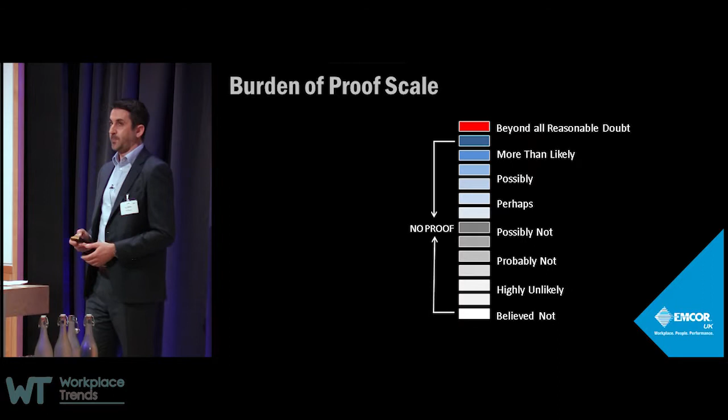Now, I did a bit of research and I discovered this, which is the burden of proof scale. So the burden of proof is used to put evidence against this scale. Obviously, you've got believed not at the bottom, all the way up to beyond all reasonable doubt at the top. And I thought, would it be interesting if we put this question against that scale? So that's what I'm going to do today. Our question for the day is, does the internal environment affect performance and productivity?

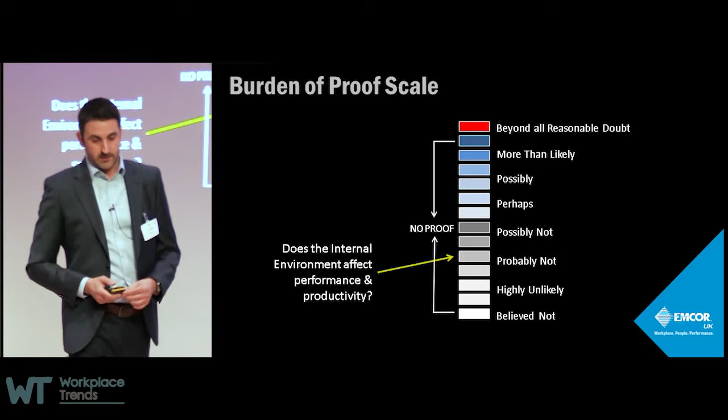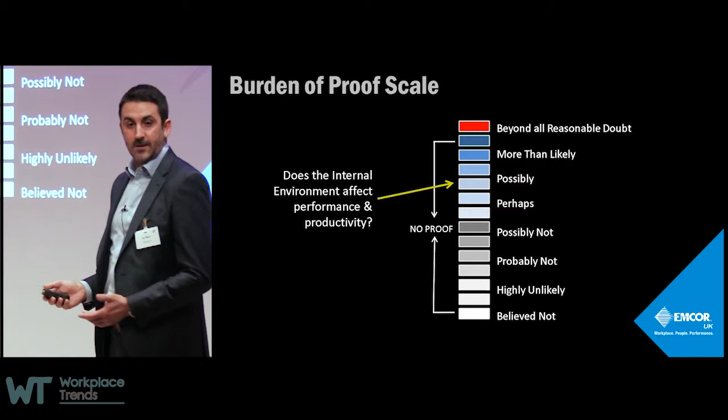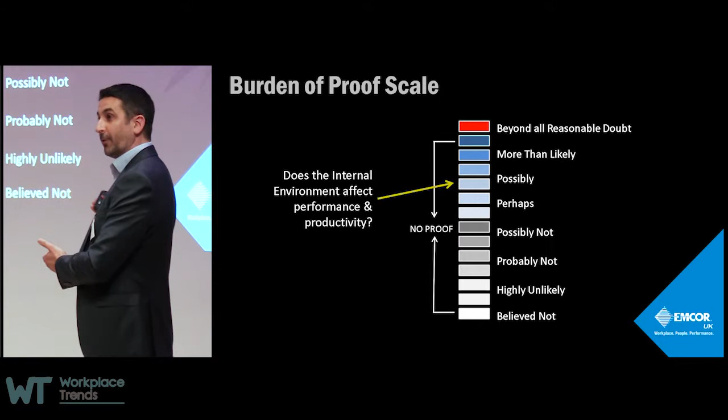So if we put this on this scale, and this is a predetermined slide, where would it be today? And I think it's round about there. I don't think that we could argue it's going to be any higher than that. Might be a bit higher, but with the data that we've got, the fact that it's not mainstream, it's somewhere around about there. Now, my aim is that at the end of this presentation, you'll all join me as members of the jury, and we'll see if we can push that level up.

Okay. So the study was done. It was a consortium of companies that came together, and it was called Whole Life Performance Plus. It was led by LCMB, with academics at Oxford Brookes University doing all the data crunching and the peer-reviewed reports. And there were case study partners, Argent, Emcor UK, and King's College London. Now, it was funded by Innovate UK and the EPSRC. I always get that wrong, EPSRC.

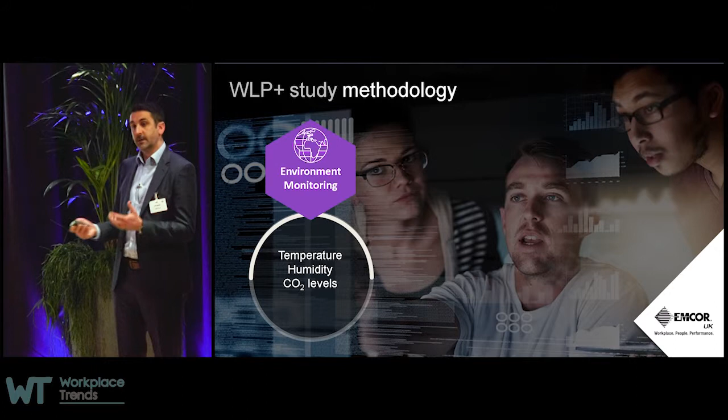It was quite a high fund, 530,000, and its main focus was to empirically validate the link between the indoor environment and productivity. So proper evidence-based management, evidence-based understanding. Now, it did that in 3 ways. We did a study of the indoor environment. We looked at temperature, humidity, and CO2. And at the same time, we were looking at the outside environment in terms of temperature and humidity to understand what's going on inside and outside.

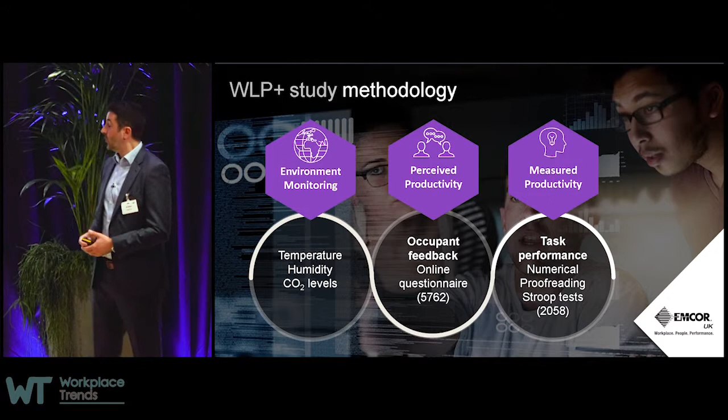Like everybody else has done today, we did perceived productivity tests. So this was basically occupant feedback, it was an online survey. I think that app would have been fantastic if we'd had access to that. But it was an online survey and 5,762 responses. And then we measured productivity. So again, this was same occupants, Stroop tests, numerical tests, proofreading tests, all that stuff. Over 2,000 respondents.

Now, the unique bit with our study is that it was in real-life buildings. And as I said, we had case study partners. This was the King's College London building. It's the JCMB building in Waterloo. 10,000 square meters, 1,200 occupants. It's an old building. It was constructed in 1938, mixed mode of ventilation and in-house FM.

And then Emcor UK, very lucky to have the National Air Traffic Services as a customer of ours. NATS immediately saw the benefit of the study and offered up the building that you see there. It's their corporate and technical centre, nothing to do with air traffic controllers. Corporate and technical centre in the leafy suburbs of Fareham in Hampshire. So two very similar sized buildings.

In the field, the approach was that we did an intervention. So we did a baseline period, baseline before intervention. We baselined the buildings in a 7-month period in which we monitored again the internal environment of those buildings and the external environment in those locations, whilst asking the occupants questions. That was it, 7 months.

We did 3 weeks of surveys. And then we did an intervention stage of 10 months, where we tweaked the environment as best we could. So obviously both those buildings are very different, quite difficult to alter the environment, but we did make some significant changes to it. And then we resurveyed everybody throughout that period to see what effects altering the environment had.

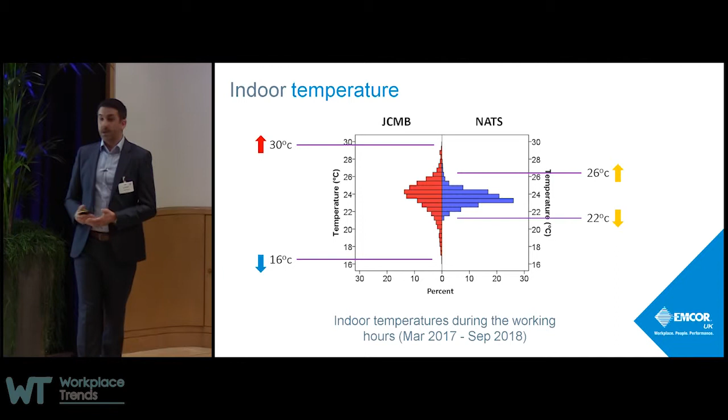So just run through the buildings because I think they're quite interesting from a start point. The two buildings, as I said, very different. JCMB, in terms of temperature, reached a scorching 30 degrees in the summer and an absolutely freezing 16 degrees in the winter, so huge range. Whereas NATS, it's mechanically ventilated, it has air conditioning. It was just a fairly constant 22 to 26.

In terms of relative humidity, there's a guideline that says that relative humidity should be between 40 and 70%. Both the buildings were below 40% for quite a lot of time. Interestingly, the NATS building was below 40% for the longest period of time. And obviously that's because it has air conditioning, but the ramifications of that is colds and flus can actually travel much easier in low humidity environments. So although we couldn't test for this in terms of a productivity score, it's something that we needed to be aware of.

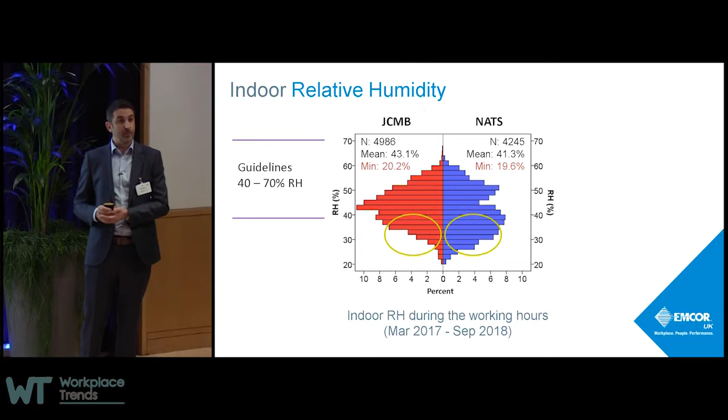And CO2 levels is the thing. So CO2 levels across these buildings varied widely. Now, the JCMB building, as I said, is a traditional building. It has windows that open. It has wet system radiators. So as you can see on that graph, it peaked at well over 2,000 parts per million. Now that's in the heating season. So windows are closed, heating's on, bad ventilation, CO2 rises, and there's nothing that they can really do about that.

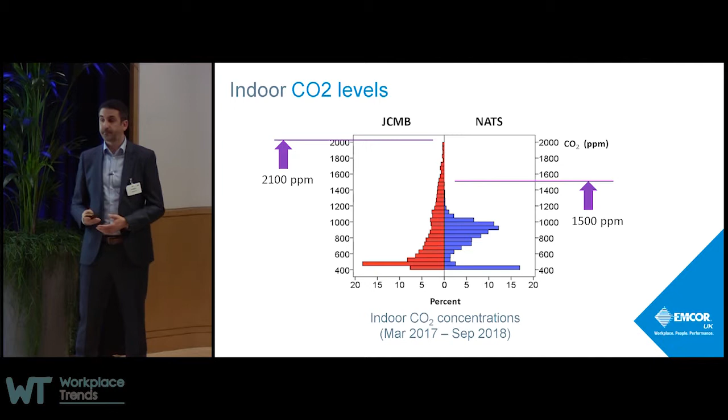So, we learned that if you feel uncomfortable, you believe you're less productive. Now, this isn't about providing people more cushions and soft furnishings, although as a workplace consultant that does help. But if you feel that your temperature variances are not being met, then you report a lower level of productivity. Now, this is shown in this graph. So we have self-reported productivity on the left and comfort on a scale of 1 to 7 across the bottom. You'll see that the more comfortable people are reporting themselves, the higher the productivity is.

Interestingly, this works for thermal sensation as well. So if you're too cool or too hot, as seen on that graph, your productivity can dive on either end of that scale. So what does this mean? Let me just go back actually, I need to explain this. There's 2 lines on that graph. There's the yellow line, JCMB, and the blue line, NATS.

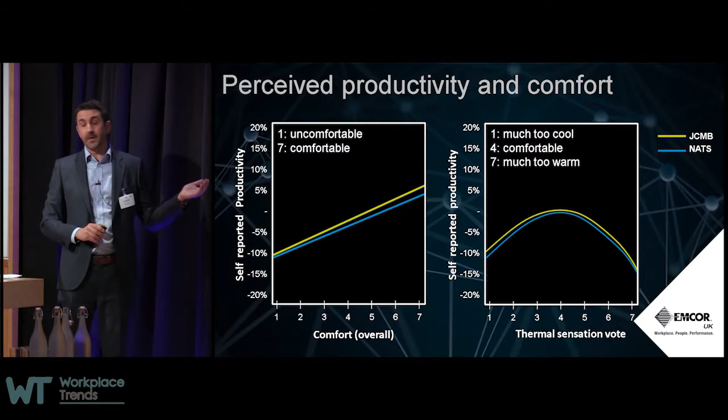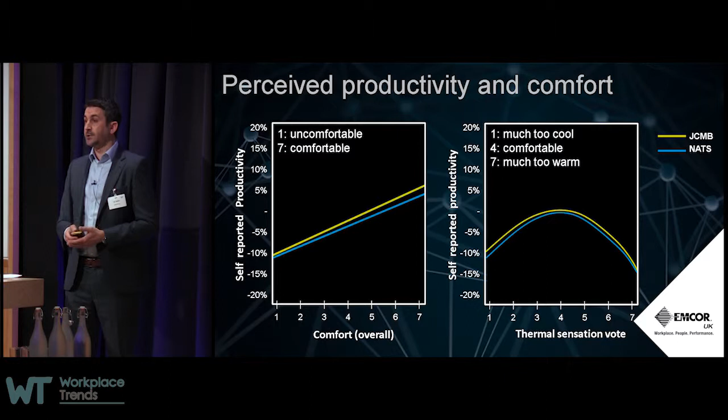Now, if you remember that the JCMB building had a wide variance of temperature, 30 to 16, and NATS was much less, you'd think that the JCMB building would be saying that they are less comfortable and therefore less productive. But interestingly, the trend followed very similar lines. In fact, the JCMB building reported slightly higher numbers. And this is because it seems that our willingness to accept certain conditions is based on our experience and expectations, which can be described by probably the most British of equations. Happiness is reality minus expectations.

And this isn't a guide or a goal, by the way. We shouldn't be saying everybody has low expectations, let's give them bad places to work. But it seems that if you're waking up in the morning and it's a really hot, sunny summer's day, and you're already hot and you're expecting to be hot at work, or cold if it's winter, then your expectations when you get there are met. You're probably not happy about it, but you're not unhappy about it.

And comparing that to the NATS building, if your expectations are to be in a tightly controlled environment, and you get there and things aren't quite right, then you are very definitely unhappy about it. And during the intervention stages, we actually saw that within half a degree, people in the NATS building would be calling up the help desk to say that they're either too hot or too cold. Whereas obviously the occupants of the JCMB building, they don't have the luxury of being able to control it other than opening a window or closing the window. So they just kind of accept it and get on with it, really.

So as I said earlier, that was perceived productivity. And I think the presentation before kind of alluded to the fact that perceived productivity does also link quite closely to actual productivity. And our study bore the same result. So again, we've got all of the tasks, proofreading, numerical testing, Stroop testing on the left-hand side there, and temperature. And we discovered that the hotter the office got, the lower the test scores became. We couldn't do it the other way around because people don't really like to be cold. And we found that quite a difficult thing.

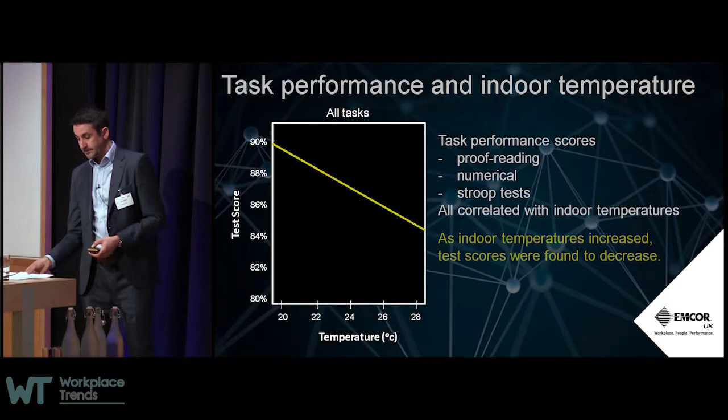But for us, and for most of this study, the real interesting thing is CO2, because CO2 is the least measured environmental condition. And I say least now, not never measured, because I was presenting this to a customer the other week and trying to explain to them about CO2, and I said, no one measures CO2, which was a really stupid thing to say, because the client sat back in his chair and said, Ian, if you look at that white box over there, we're measuring CO2 in this meeting room right now, which made me feel a little bit silly. But I went over and I looked at that white box and read the number, came back, sat back down again, and said, oh, it's 560 parts per million.

And he sat there and eventually went, is that good? So I reclaimed that. I said, yes, aha. Isn't it interesting that you're measuring something and you have no idea what it means? And it is good. 560 parts per million is about 500 lower than the guidelines. So it is a good score.

But consider this as well. We were in a meeting room. There were only 5 of us in that meeting room. But how many meetings do you go to where there's 10, 15, 20 people? And you're sat there for 2-3 hours maybe. Most of the decisions you make in a meeting are usually at the end when you discuss and vote on what's going to happen. Now, you've been in that meeting room for that period of time, and if you're not measuring it, you have no idea whether the CO2 levels are rising or not. But your brain does. Your brain will notice it, and you'll start to feel tired. You'll start maybe thinking that the air is a bit stuffy. Maybe you'll be thinking about what you're having for dinner later on.

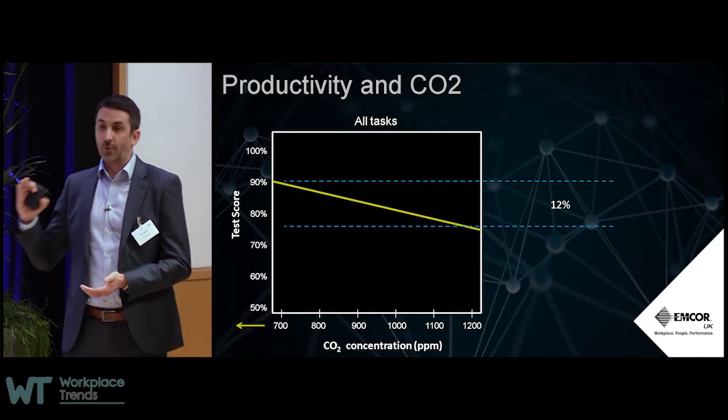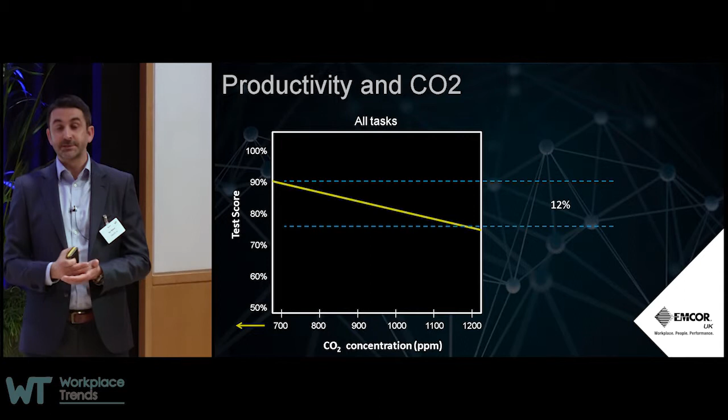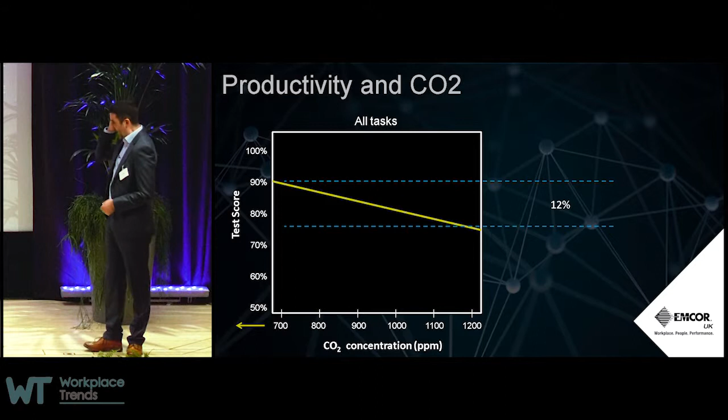So I'm going to try to win the understated comment of the day award here. Breathing is important. I think I've won. We take 16 breaths a minute, 960 breaths an hour, and 23,000 breaths in a day, average. Now, interestingly, or I found it interesting anyway, the volume of an average breath is about the same size as a mineral water bottle, 500 millilitres. That's 500 millilitres in, and if you're lucky, 500 millilitres back out again.

If you captured all of those outgoing breaths, by September, you would have breathed out enough to fill a hot air balloon. Now, I know what you're all thinking. You know someone that might do that in a day. Maybe even someone might manage that this afternoon.

But it's something that we take for granted. And from a perspective of CO2, it's obviously very important. And it strikes me that when we go into buildings that we don't have any control over the environment of, we kind of hand over that responsibility to the people that manage that space. And unless the people that manage that space measure that environment, whatever that environment of that building is, it's about to be inside you.

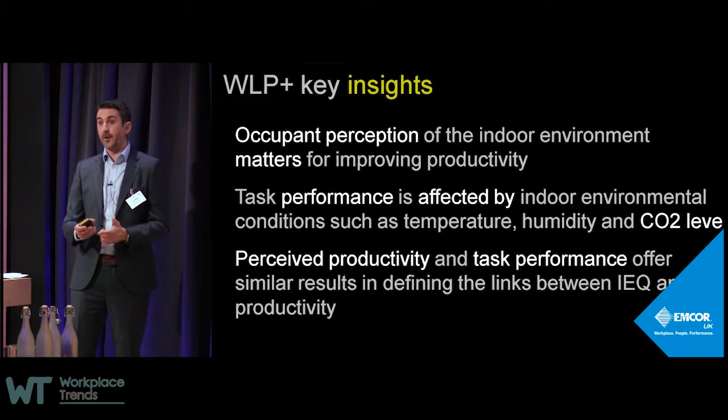The findings are 12% higher scores on proofreading tests below CO2 levels of 1,400. Numerical tests, the CO2 needed to be a little bit lower, but 12% when the CO2 was lower than 1,000 parts per million. And in one of the studies that we did, the study group was actually 38% quicker at performing the task when the CO2 was below 1,000.

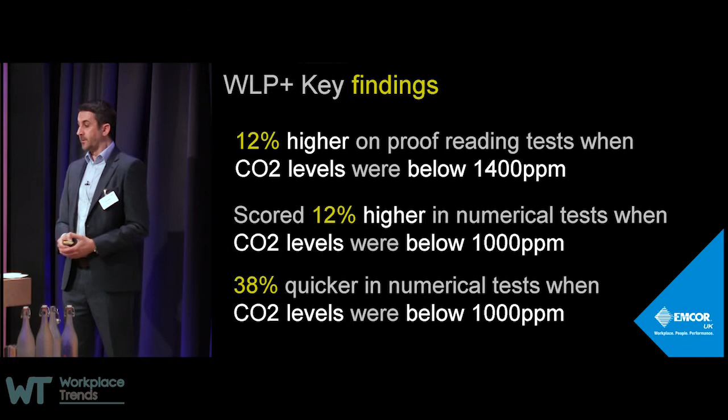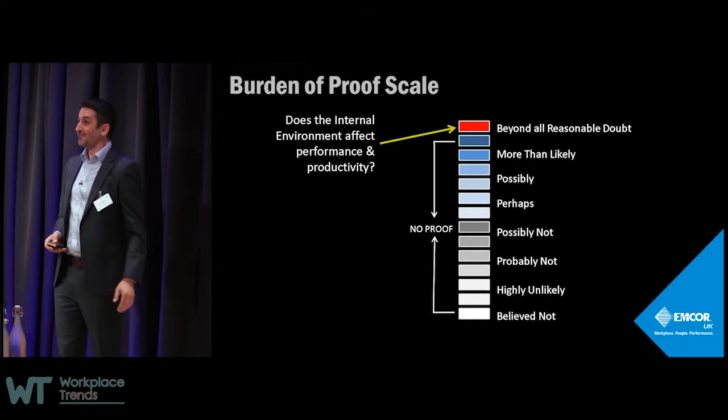So, what level of proof do we need about the harmfulness of something before we act? Again, 100 studies. This was over 2 years, so it's a lot of data. If we can go back to our burden of proof scale and again ask this question, does the internal environment affect performance and productivity? Now, it's a predetermined slide, but I hope that you all agree with me when I press the button and we go, how far? Yeah, well, we can't go any lower than that because otherwise it's no proof, right? So it's proof. We've got to say that it's up there.

So what's next? Well, I think that what's next is we need to increase our monitoring of the space. We've got the technology to do it now. Traditionally, we'd do this with a return air sensor and a BMS system, but we've got IoT, and we can put sensors all over the workplace, gather as much data as we need, so it's something that we should be doing. Obviously, back to my customer, I think you need to understand the measurements that you're getting. It's very important. There is no point measuring something unless you're going to do something with it or understand it. And I think that we need to bring it into the mainstream so that everybody can benefit from these results.